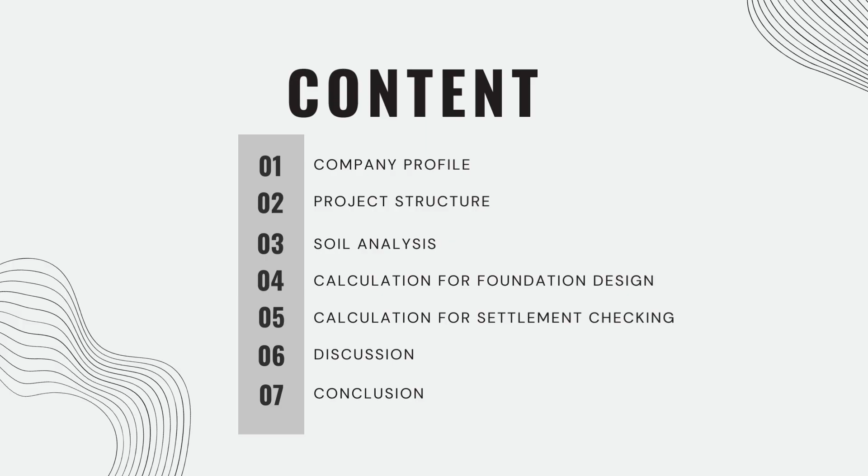Today I would like to present about our company background. Soil Tech Engineering was founded in 2000 in Batu Pahat, Johor. It specializes in soil investigation and geotechnical engineering, serving clients in construction, infrastructure, and environmental management with innovative and reliable services. Our skilled team uses the latest technology to provide high-quality, data-driven insights for successful projects. It was established by seasoned geotechnical engineers and environmental professionals, and Soiltech is also committed to excellence and industrial advancement. We use advanced technology and best practices for comprehensive soil investigation, including sampling, analysis, testing, and site assessment.

Our precise data helps clients mitigate risk, optimize design, and ensure project stability and safety by understanding subsurface complexity. Next is our vision and mission for this company. Our vision is to be the leading provider of innovative, reliable, and sustainable soil investigation solutions, empowering our clients to build with confidence and contribute to a safer and more resilient infrastructure. Our mission is to deliver comprehensive and precise soil investigation services through advanced technology and expert analysis. We are committed to ensuring the success of our clients' projects by providing critical data and insight that drive informed decision making, advance project safety, and promote sustainability.

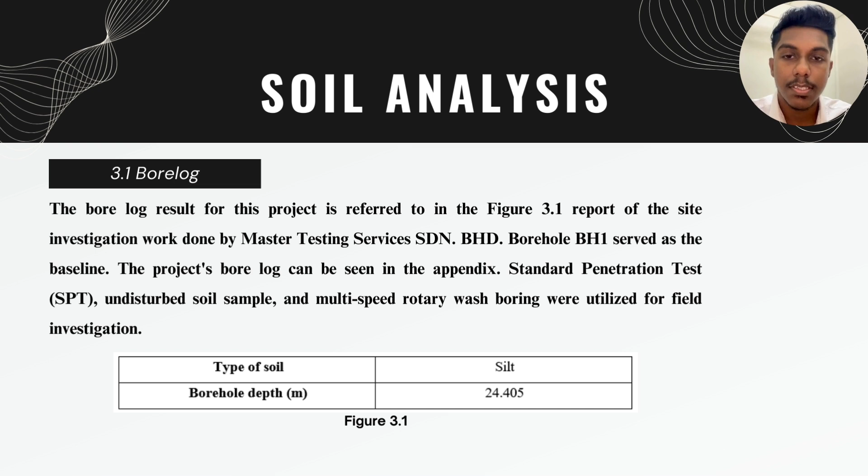Firstly, about the borelog. The borelog result for this project is referred to in Figure 3.1 of the site investigation report done by Master Testing Services Sdn Berhad. Borehole BH1 served as the baseline of this investigation. The project's borelog can be seen in the appendix. Standard Penetration Test (SPT), undisturbed soil sample, and multi-speed rotary wash boring were utilized for field investigation in this test. The type of soil used is silt soil, and the borehole depth was 24.405 meters.

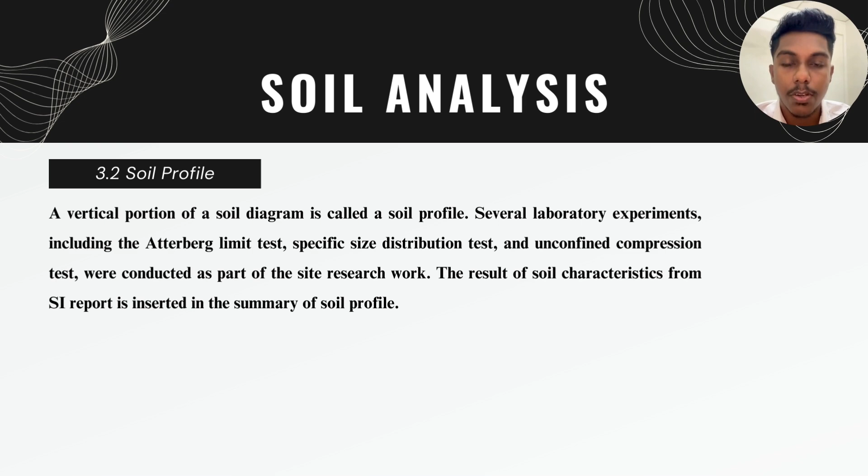Next, I'll explain about the soil profile. A vertical portion of a soil diagram is called a soil profile. Several laboratory experiments such as the Atterberg limit test, particle size distribution test, and unconfined compression test were conducted in this research work. The results of the soil characteristics from the SI report we obtained are inserted in the summary of the soil profile.

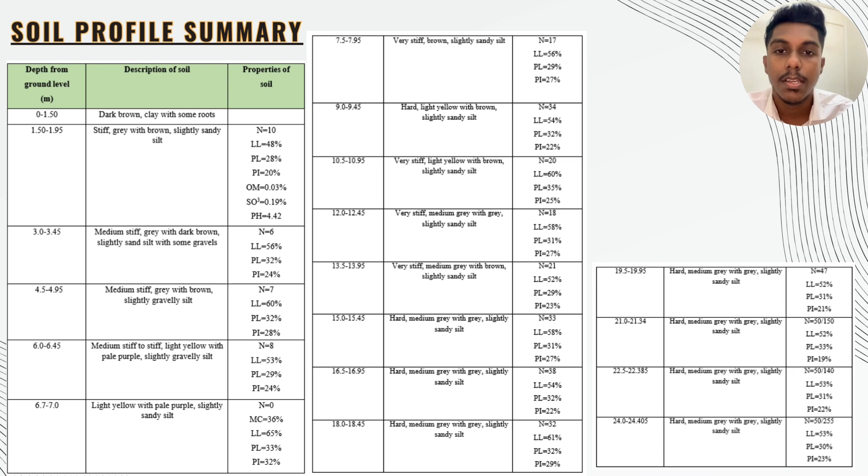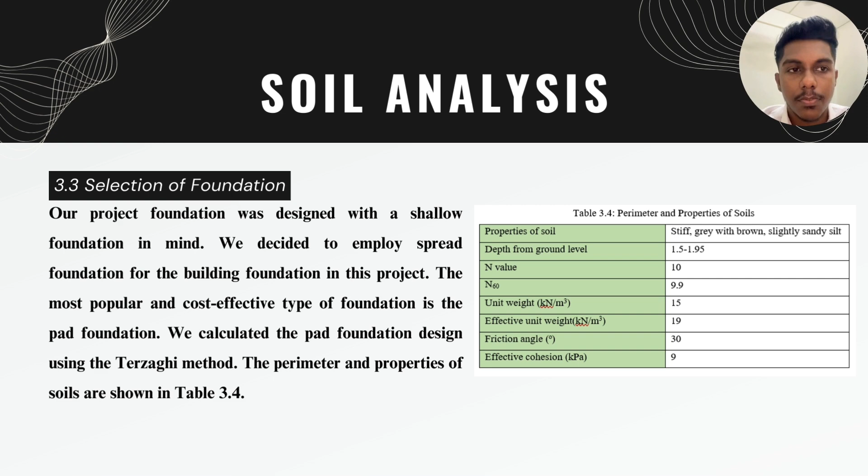The properties of soil were stiff, grey with brown, and slightly sandy silt. The depth from ground level was 1.5 to 1.95 meters. The N value was 10. The N60 value was 9.9. The unit weight in kN per meter cube was 15. Effective unit weight was 19. The frictional angle was 30 degrees. The effective cohesion in kPa was 9.

Assalamualaikum, hi, my name is Binti, my matrix number BF2100070. For our group, we have chosen to construct a double-story house in Parit Sulong, Batu Pahat, Johor, with 5 bedrooms, a carporch, 2 terraces, and 3 bathrooms.

The house will have a reinforced concrete foundation that will be used throughout the construction to ensure stability and durability. The ground floor will include a large living space, dining room, kitchen, bedroom and guest room, while the upper floor will feature 3 additional bedrooms, including a master bedroom with a bathroom and 1 shared bathroom.

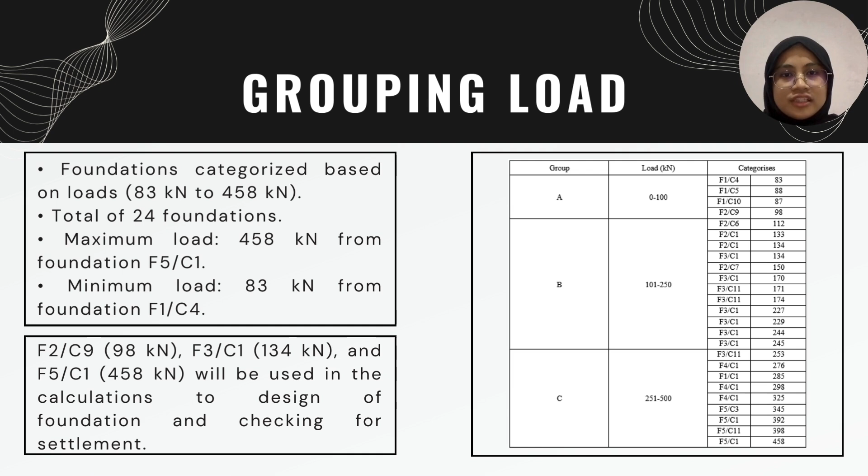The foundation will be grouped into 3 categories based on their loads, as shown in this table, which summarizes the load applied to all foundations. The load of the foundations in this project ranges from 83 kN to 458 kN, so there are 3 groups with different load ranges. The building has a total of 24 foundations. The maximum load is 458 kN from foundation F5C1, while the minimum load is 83 kN from foundation F1C4.

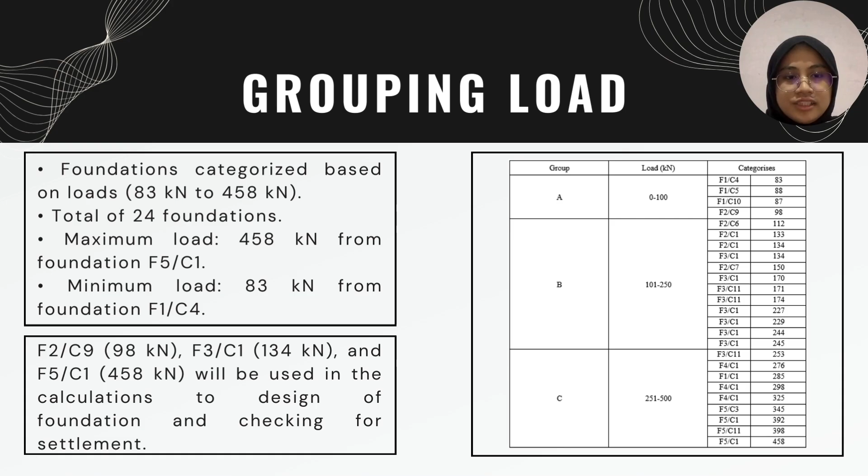Hi, my name is BINTI and my matrix number is DF210072. For this presentation, I will explain the part about calculation of pad footing for the building in this project by using engineering design forms.

As mentioned before, the pad footing of this building has been divided into 3 groups based on the value of the load. In this part, the pad footings F2C9, F3C1 and F5C1 have been selected for further calculation to propose the suitable size to be used in this project.

In this calculation, the same assumptions were made for all 3 pad footings, where the dimension, axial force value, diameter of bar and column size were based on the structural layout plan. Design life is 50 years, exposure class is XC2, and the material properties are FCK value of 30, FYK 460 Newton per millimeter square, concrete unit weight is 24 kN per meter cube, and soil bearing capacity is 100 kN per meter square.

The first step is to calculate the durability and bond requirement, assuming minimum cover with regard to bond is 12 mm, minimum cover with regard to durability is 25 mm, and allowance in design for deviation is 10 mm, to calculate C nominal by using the maximum value between C min and adding the value with C dev. The value for C nominal for this pad footing is 35 mm.

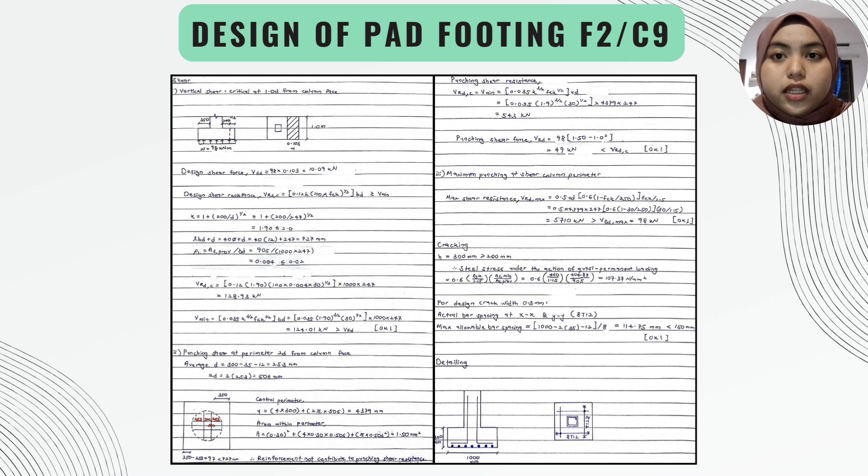Next, the shear calculation involves vertical shear at 1.0D from column face, punching shear at perimeter 2D from column face, and maximum punching shear at the column perimeter. Based on the calculations, it can be concluded that V min is larger than the design shear force VED, VED is less than the design shear resistance VRDC, and max shear resistance VRD max is larger than VED max, which are okay and pass the calculation.

Then the cracking check is performed, where the H value is compared to 200 mm, under the condition of steel stress under the action of quasi-permanent loading, if above the compared value.

For design crack width 0.3 mm, the value of maximum allowable spacing is 114.75 mm, which is less than 150 mm, and it passes the calculation.

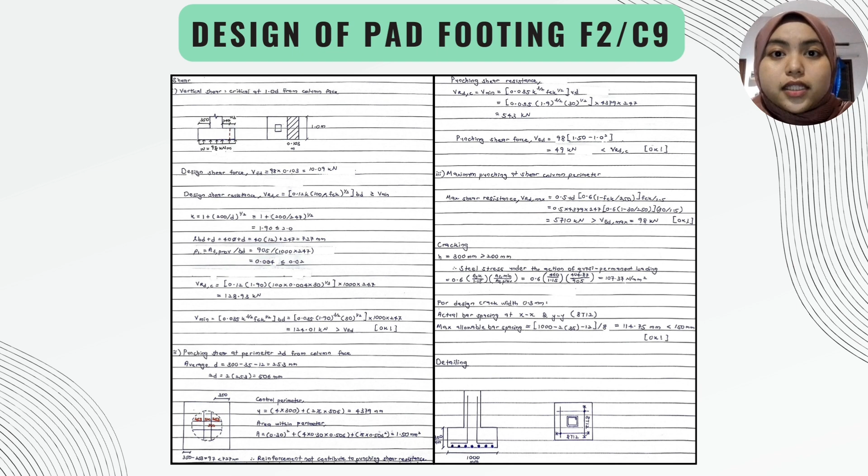The last step is the detailing of the foundation with the size calculation for pad footing F3C1. Most of the calculation steps and assumptions are the same as explained before. The value of load used in this foundation is 134 kN from the structural layout 10.

Also, the value from estimates: N value is 151.2 kN and W is 14.3 kN. The size tried for this pad footing is 1.3 by 1.3 by 0.3 meter, and the service soil pressure value is less than the soil bearing capacity. All requirements in this calculation pass based on the engineering design format.

For the reinforcement part, based on the AS min value, the AS provided is 566 mm square, and the bar size used is 5T12. The next calculation until the end is the same as the pad footing before, and all requirements and checking status pass.

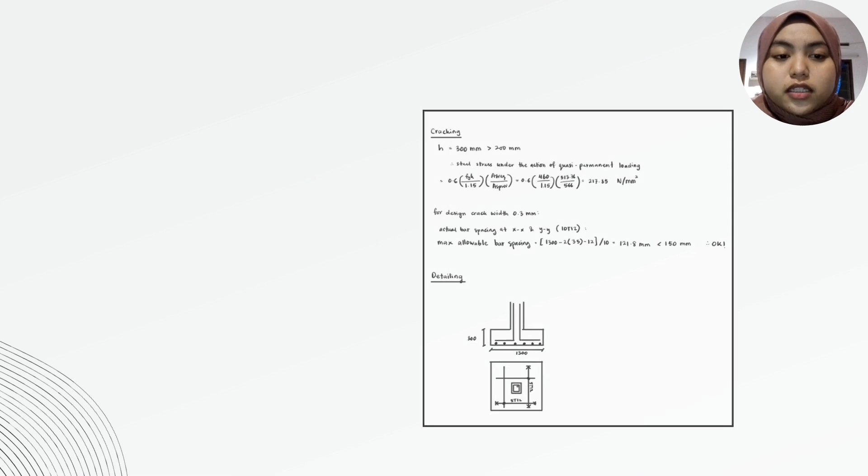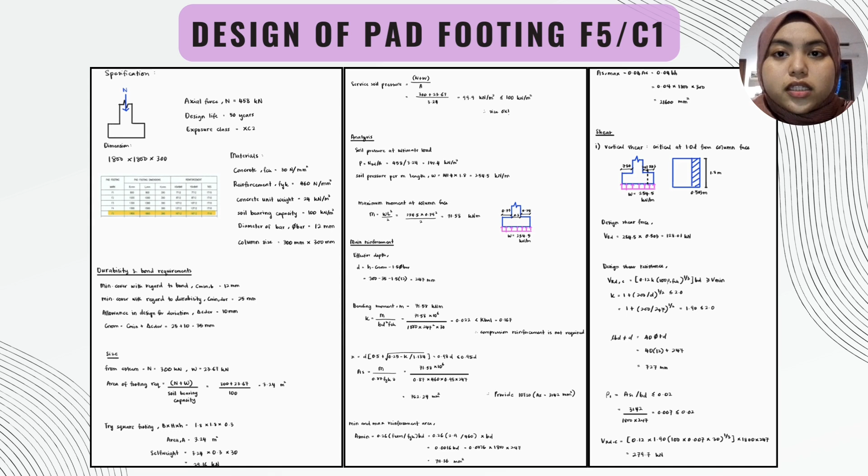For the calculation of pad footing F5C1, the value of load used in this foundation is 458 kN. The value from estimates: N value is 300 kN and W is 23.67 kN. The size tried for this pad footing is 1.8 by 1.8 by 0.3 meter, and the service soil pressure value is less than the soil bearing capacity.

The other assumptions are made the same as before. From the manual reinforcement calculation, the value AS provided is 3142 mm square, and the bar size is 10T20. The rest of the calculation is the same as explained before, and it passes the checking and requirement based on the engineering design format.

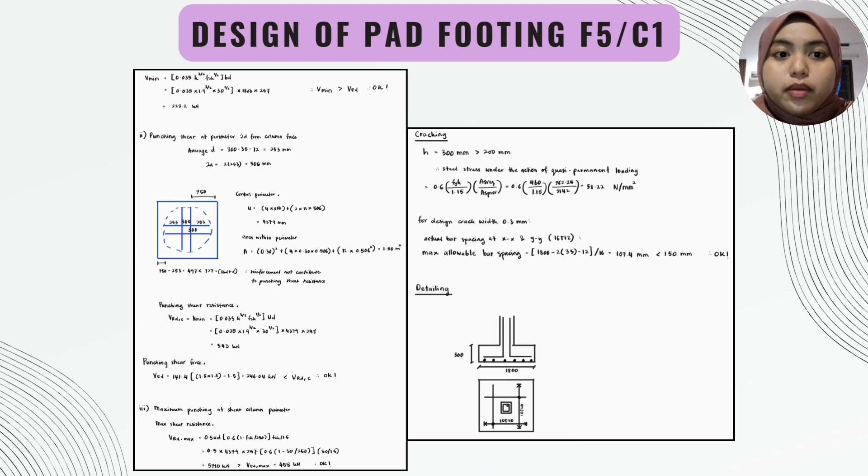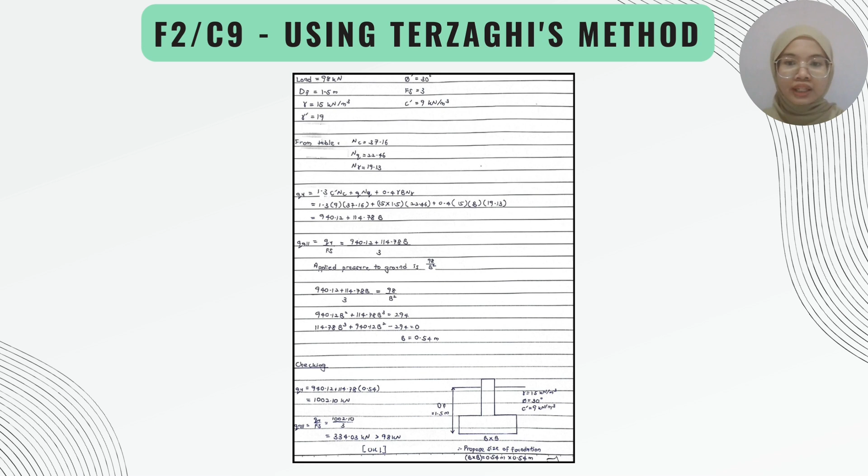NC, NQ, and N gamma can be found through the table by considering the friction angle of the soil. By using this formula, the proposed foundation for F2C9 is obtained, giving a size of 0.54 by 0.54 meter. Finally, by checking the ultimate and allowable load of the proposed foundation, it was found that Q allowable for F2C9 is okay because it exceeds the applied load of this foundation.

Next, for foundation F3C1, the applied load is 134 kN, and the calculation is the same as before. For this proposed foundation, the size taken is 0.63 by 0.63 meter, and after checking the allowable load, this size can be used.

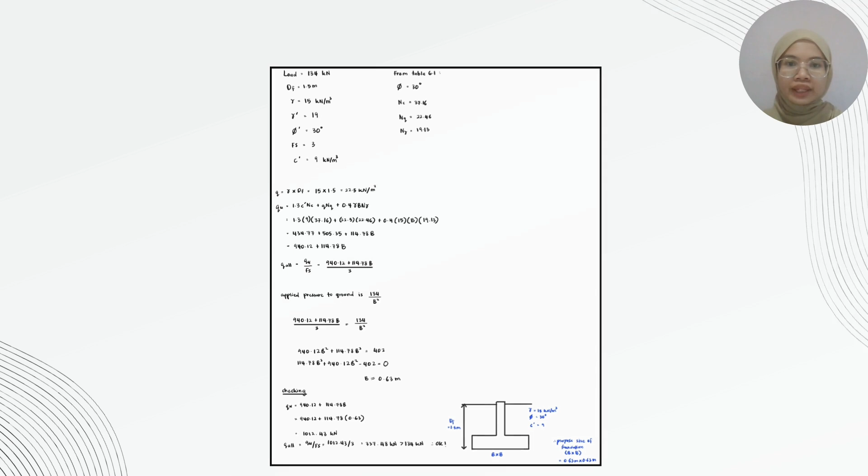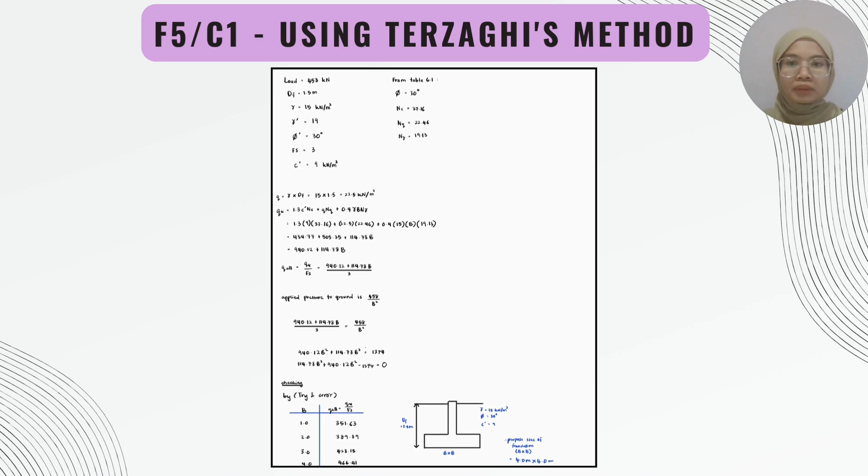Next, the settlement of foundation should be checked to prevent any structural issue that can arise as a result of rapid or excessive movement. By using the proposed size, the net allowable bearing pressure is calculated to obtain the settlement result for foundation F2C9, and it was found that this foundation is acceptable.

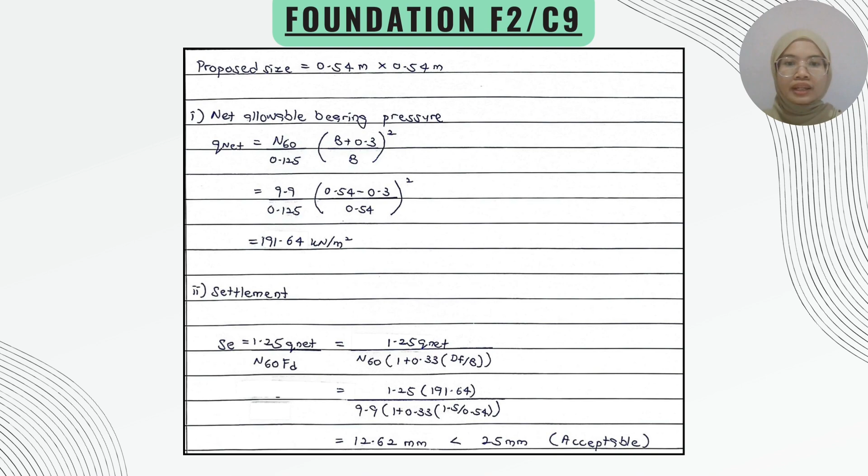Next, for foundation F3C1 and foundation F5C1, they are also acceptable after checking their settlement based on the proposed design of foundation.

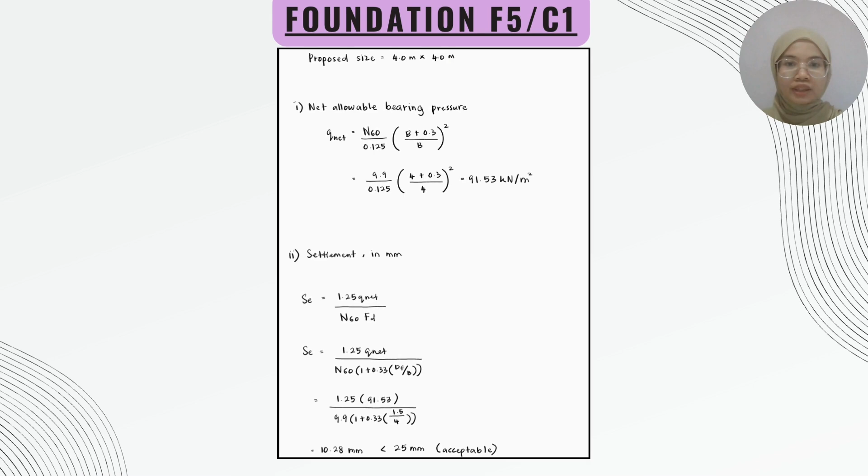This project focuses on the design of square, shallow foundations, chosen for cost effectiveness and ease of construction compared to deep foundations. The advantage of this project is to minimize cost, speed up construction, and reduce soil settlements. Three foundations of varying size were analyzed using Esteem software for load application.

Soil properties from borehole 2, including an angle of friction of 30, N60 of 9.9, and effective cohesion of 9, were used for the calculation. The saturated unit weight was 19 and the effective unit weight was 15.

Design verification involved cracking checks using calculations via the Terzaghi method, all of which pass the necessary requirements.

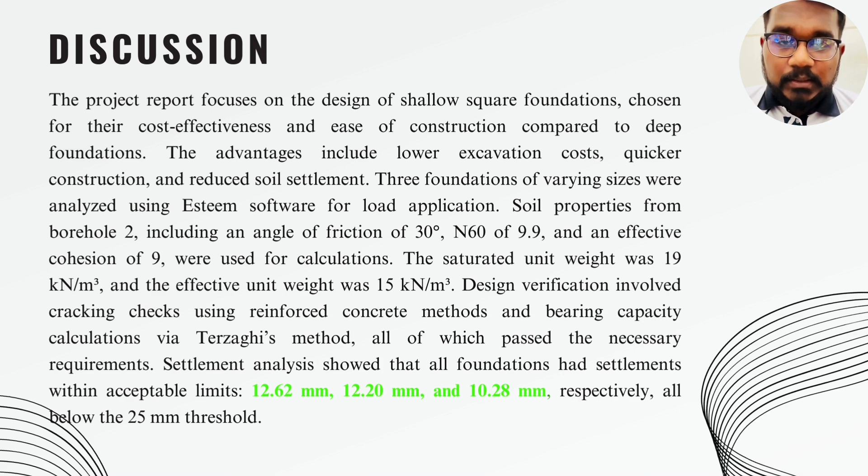Settlement analysis showed that all foundations had settlement within acceptable limits: foundation 1 was 12.62, foundation 2 was 12.20, and foundation 3 was 10.28. This concludes that all the readings, being below the 25 millimeter range, are acceptable.

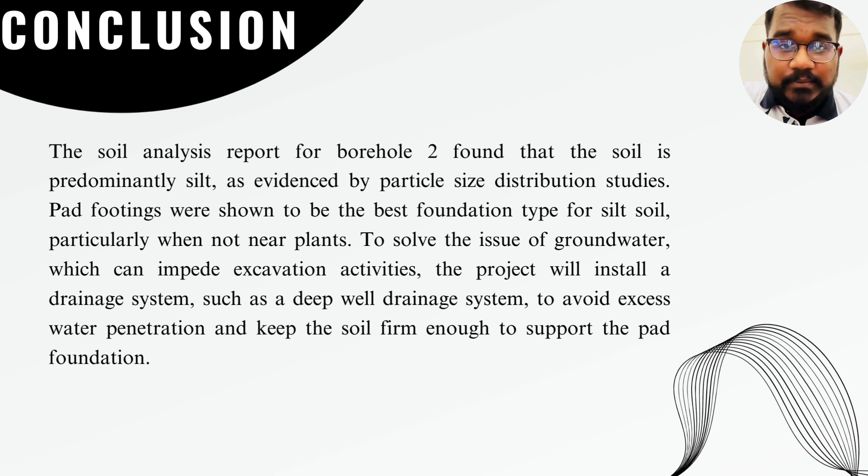As a conclusion, the soil analysis report for borehole 2 found that the soil is predominantly silt, as evidenced by particle size distribution studies. Pad footings were shown to be the best foundation type for silt soil, particularly when not near the plants. To solve the issue of groundwater, which can impede excavation activities, the project will install a drainage system such as deep well drainage to avoid excess water penetration and to keep the soil firm enough to support the pad foundation.